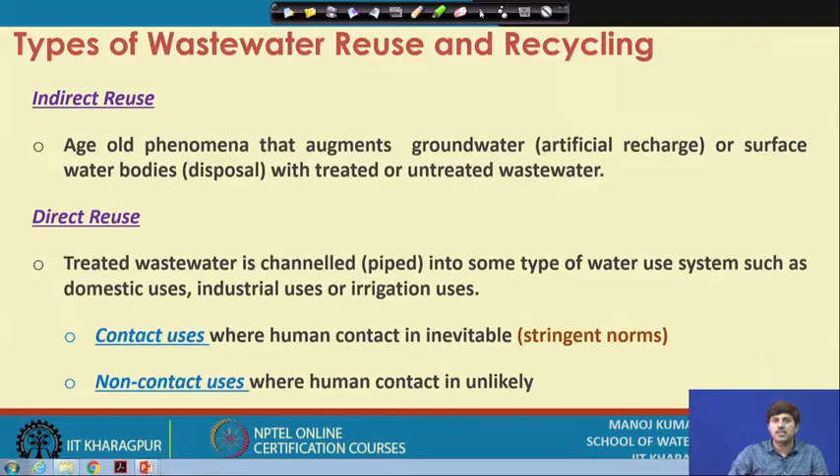What's more important and a newer phenomenon is direct reuse, because indirect reuse has a lot of complexity involved - like pollution of resources, stress on resources, as we discussed in the previous class. All those factors come in this indirect reuse or recycling aspect.

So what's better is direct reuse. Under direct reuse, the treated water is channeled or piped into some type of water use system, which could be domestic use, industrial use or agricultural uses, and these uses can again be subclassified in terms of contact uses and non-contact uses.

Contact uses are the ones where human contact is inevitable. So if there is likelihood of human contact with that water which has been reclaimed from wastewater, the norms of reuse or recycling are more stringent - we have to treat that water to a higher degree in order to protect human health.

Which is one of the most prime objectives of civil society, civilized systems. We are more bothered about human health, and there would be risk if the reused or recycled water is undergoing some sort of contact uses. So that is why the norms are more stringent for these.

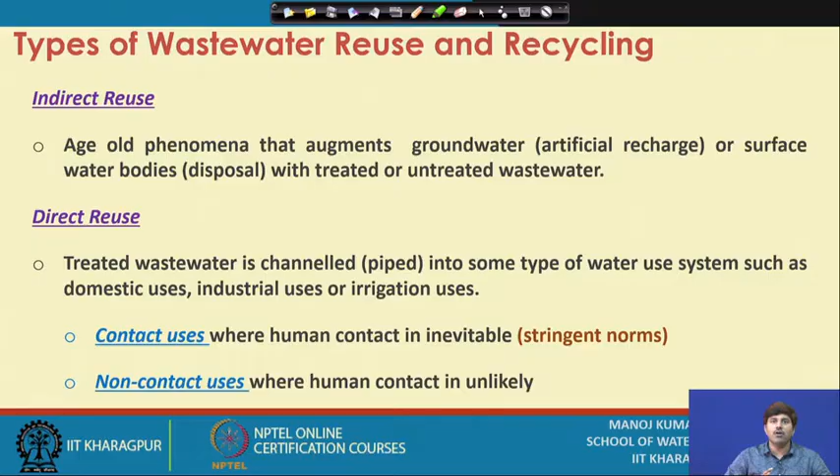So then we see what to recycle. When we say wastewater recycling, we go back to our basic discussions from the beginning of this course, that wastewater are of different natures, different characteristics, and we can subclassify or compartmentalize this wastewater - there is a greywater component of the wastewater.

So we can make or come up with a strategy for recycling just greywater. There could be a discussion where we see that greywater recycling is more preferred or favored as opposed to sewage recycling or the whole of wastewater recycling.

So greywater, as we discussed earlier, is the water which comes from household uses apart from the toilet - water coming from washing clothes or washing machines, washing utensils, bathroom, water coming from shower. All those are sources of greywater, and we can have water coming from the kitchen. So those are sources of greywater, and we can adopt a suitable treatment strategy, whatever the strategy could be.

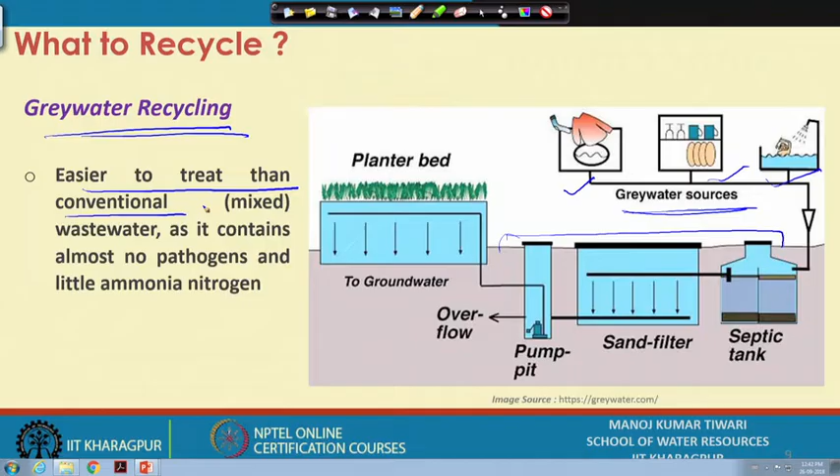Because it is easier to treat it than a conventional wastewater system or mixed wastewater system. The issue with the mixed wastewater system is that when toilet flush is also included, a lot of solid mass comes in, a lot of organic load comes in the form of fecal matter, and a lot of pathogens come in, which survive on that fecal matter. So that is why that portion is quite contaminated, and we do not include that.

If we do not include it with the other components of the wastewater coming from, say, the kitchen, bathroom, washrooms, those places, that means if we do not add this black water component along with the greywater component, the water we have will be much milder in terms of pollution. Okay. So, because it has milder pollution, it is easier to treat this greywater component.

We can treat it at lower cost. There is not that great a degree of pollution in this, only relatively much milder pollution. So that is how the treatment cost decreases, and the reuse applications could be more, as opposed to the water coming from the toilet.

Okay. So, since it contains almost no pathogens and very little ammonia, nitrogen, and very little organic loading, it is advisable, and people are giving more emphasis on the treatment and recycling of grey water as opposed to the entire sewerage or wastewater system, for that easy reason, particularly if it is to be done on a decentralized scale, let us say a household scale.

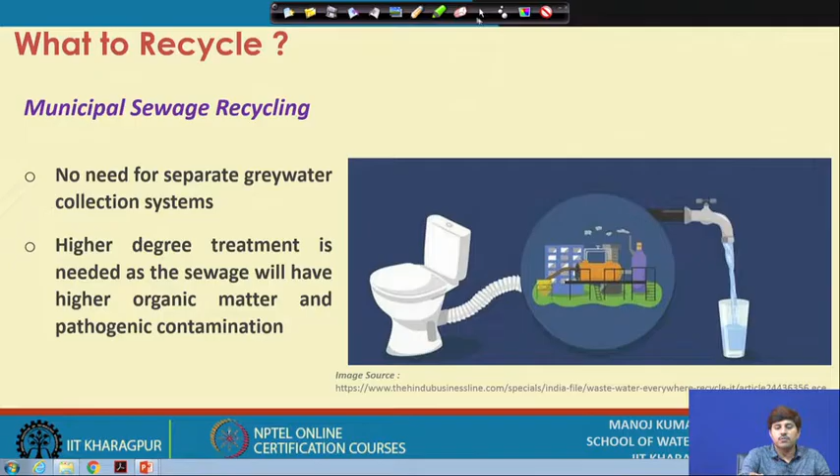Okay. So those are the advantages and disadvantages associated with whole sewage recycling. We will save some cost by not having separate collection systems and separate transportation if needed, but at the same time we will have to go for a higher degree of treatment as well. Okay.

Then there is industrial effluent, which can be recycled. Industrial effluent recycling is reusing treated wastewater, usually for industrial processes. Within industry it is far more preferred to use it for industrial processes, or for other processes at the plant site itself. Remember, in the last class we were discussing the concept of zero liquid discharge.

Industrial effluent recycling is more associated with the zero liquid discharge concept, where we can reuse or recycle the whole of the waste generated, either for some industrial process within the industry or for other applications like gardening, flowering, and cleaning, washing, all those purposes within the industry. So not letting any effluent come outside the boundary or periphery of the industry.

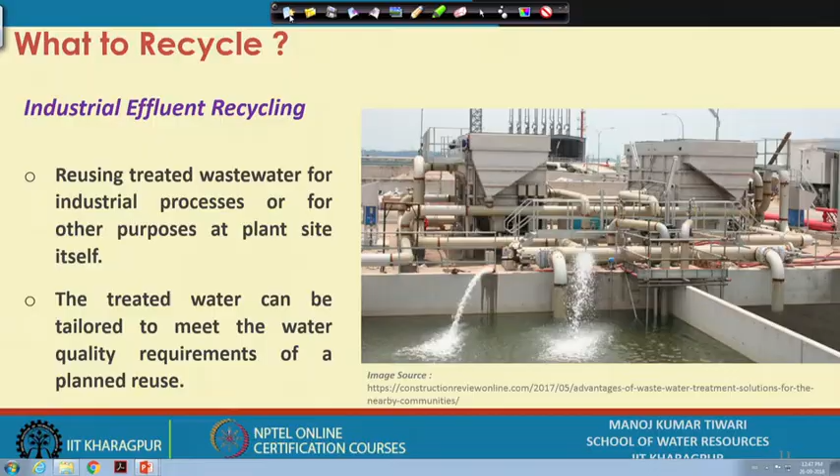So, this treated water can be tailored to meet the water quality requirements for planned reuse, and this planned reuse, as we said, could be anything: it could be industrial processes or other aspects taking place within the industry. Okay. So, that is one component.

Then there is stormwater or rainwater uses. Okay. So, we can go for stormwater or rainwater uses. This is not exactly a kind of reuse, because when we collect stormwater or rainwater, that is not used water, that comes naturally to us, but if we do not use it, it is considered as a component of wastewater, or it has to be treated as wastewater.

So, stormwater is collected through stormwater drains or channels; many times, if we have a combined sewerage system, it is mixed with the wastewater and then treated together. So, that becomes quite a challenging task because of the large volume and because of the milder pollution due to the dilution with the stormwater.

But eventually, the stormwater can also be considered as a resource, and using this stormwater can essentially be considered as wastewater reuse, because anyway it is being disposed of as a form of waste. So, if we are able to use that, we can say that we are using a component which is considered as a waste, right. So, stormwater harvesting systems are to be installed to collect stormwater or rainwater and recycle it, usually for irrigation and other purposes.

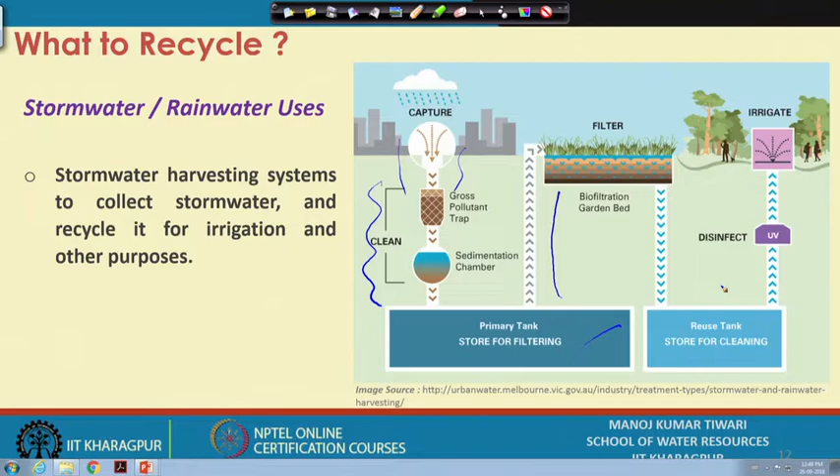Okay. So, we can capture the stormwater coming in, pass it through mild treatment systems, then store it in a tank, and from there onwards we can use it for the purpose. Okay. So, that is how the stormwater or rainwater reuse concept can also be utilized.

So, these are the different sectors for reuse. Okay. As we discussed, we can reuse or recycle these different components. We can reuse greywater, whole of the wastewater, industrial water, and stormwater that is being collected. Okay. Agricultural runoff can also be recycled, but since it comes at various different places, the collection is quite tricky and quite difficult.

So far we discussed the different components or types of wastewater which we can think about reusing. Now, if we see the opportunities where we can reuse, reuse can be in two forms. One is reuse without treatment, and the other one is when we go for certain treatment for reusing the wastewater. Reuse without treatment, since we are not providing any treatment, is obviously going to be a cost effective system.

Okay. The cost of these systems is going to be low, and this reuse without treatment can usually be for two types of application. One is again quite an age-old philosophy, which is small scale agricultural application. Now, I am sure most of us have at some point of time spent some time in the villages or have visited the villages.

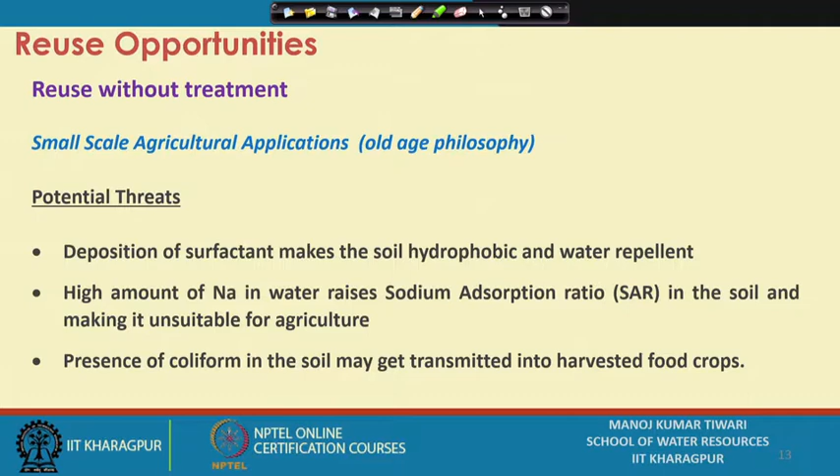If there is high sodium in the water, that can raise the sodium adsorption ratio of the soil, making it unsuitable for agricultural purposes. And if there are coliforms present in this kind of water, they may get transmitted to the harvested crop system as well. From water they can get transmitted to soil, from soil to the crop, and if we consume those crops, there may be certain health problems associated with that.

The other option of using wastewater without treatment is a relatively much newer philosophy, which is for domestic application, using it for toilet flush. People think particularly of grey water, because the toilet flush water may not be used again for toilet flush. But in a few apartments, a separate grey water collection system has been installed, and the grey water is channelized to toilet flushes without any treatment.

So, the grey water, or part of the wastewater, can be used for the toilet flush system, which is a new philosophy that was not in practice earlier. So, we can use it only for non-contact applications. There are certain potential threats associated with this as well.

The threats are that there could be a possibility of clogging in the pipes due to the deposition of suspended solids. The water which you are collecting may have certain suspended solids, and if you allow that to go to the toilet flush, there might be some settlement, some sedimentation, and if there is a lot of deposition, your pipe systems or drainage systems can actually get choked because of these suspended particles.

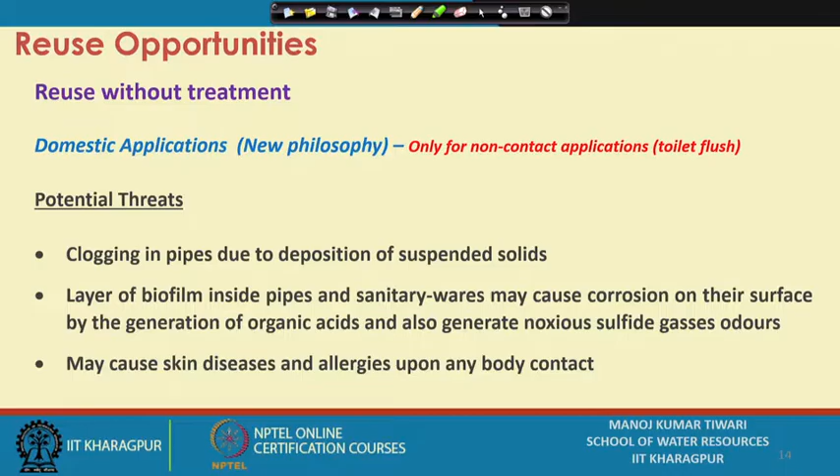So those are the reuse opportunities without treatment. There are major reuse opportunities with treatment. When we say reuse and recycling of wastewater, one inherent component is that we reuse it with treatment. With treatment, reuse options include the irrigation sector, so landscape, agriculture and aquaculture; non-contact domestic application, contact domestic application, and industrial application.

If we are able to purify that water, since the wastewater has been converted to pure water through proper treatment technologies, then depending on the degree of treatment we provide, we can select the specific reuse option. If we can treat it to the purest level, it can conceptually be used even for drinking. Because if you have removed all the contaminants, processed it fully and put it through an RO system which ensures removal of all contaminants, why can this water not be used for drinking? Keeping aside the social obligations.

So if you keep aside the social obligations, when you reclaim the pure water from a wastewater, why you cannot use that water for whatsoever purpose? And there have been cases, like in Singapore, where the NEWater system actually treats the sewage to the level of an RO system, and then the reclaimed water is augmented, basically mixed with the domestic water supplies, and people are using it. So absolutely there is no problem, there is no health concern, there is no risk.

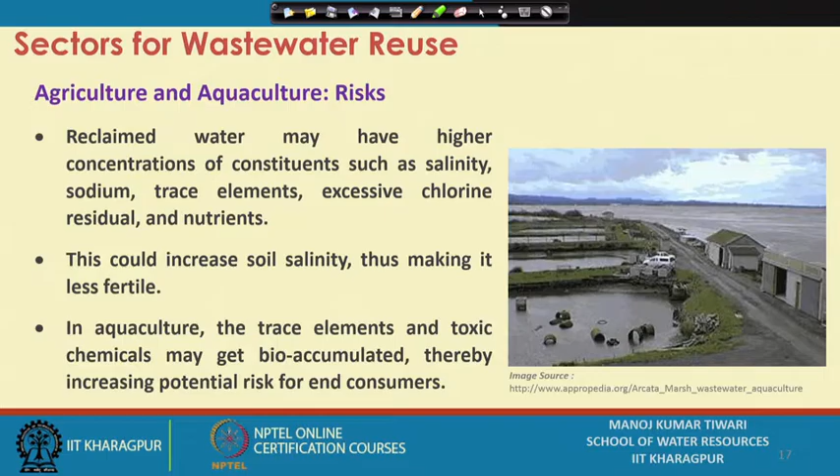So, what are the various risks involved in the agriculture and aquaculture reuse of wastewater? The reclaimed water may have higher concentrations of various constituents such as salinity, sodium, trace elements, and there might be chlorine residual, because we chlorinate, we disinfect the water before supplying it to the households. So there might be residual chlorine, there might be a higher degree of nutrients. Nutrients are not that much of a problem for agricultural systems, but if they are excessive, again that is not desirable.

But if these kinds of contaminants come into the soil system through irrigation, they can increase the soil salinity, thus making the soil less fertile. In aquaculture also, trace elements and toxic chemicals which are there may bioaccumulate, thereby increasing the potential risk to the end consumers of these aquaculture products.

So, if you are going for, say, fish farming in contaminated water, what will happen is that if there are some toxicants present, they may be consumed by the fishes, they may be retained in the body of the fishes, or they can get absorbed on the body. So when that fish is consumed by someone, those toxicants can get transferred to the person consuming it. So the end consumers may get affected by these contaminants. That is the major risk associated with this.

Then there is the municipal sector, so we can reuse it at the household level for toilet flushing, or we can reuse it only for non-contact uses like air conditioning, irrigating lawns, gardening, etc.

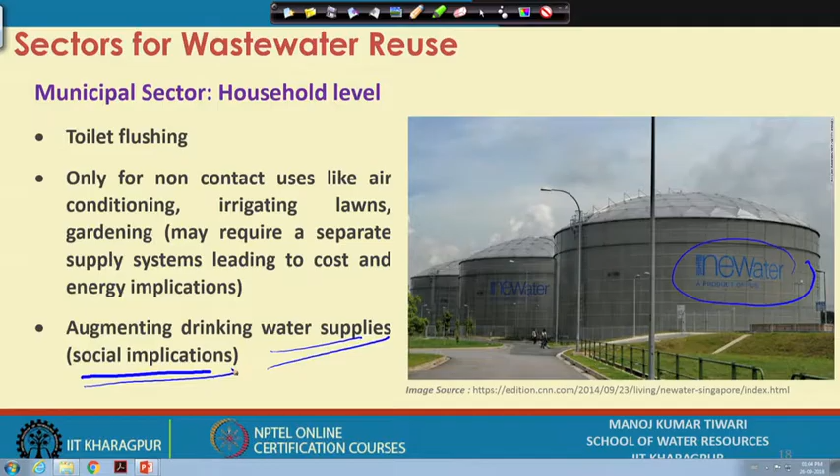But this may have certain social implications, which we will discuss in later classes, that people may not be readily able to accept recycled wastewater coming into their drinking water or kitchen. If you know that the water you are flushing from your toilet is going to come back again to your kitchen and you are likely to cook food in it or drink it, there might be certain social reservations. These reservations have been seen in many parts of the world, not only in developing countries or India, but in many developed nations also. So public acceptance of reusing water for drinking purposes is one of the major challenges today when we think about reusing the entire sewage or wastewater for domestic supplies.

Then there are various other urban uses in the municipal sector, which could include irrigation of public parks and recreational centers, landscaping areas surrounding public buildings and facilities, and irrigating golf courses. There are various commercial uses like vehicle washing facilities, laundry facilities, window washing, dust control, watering streets, and mixing water for pesticides, herbicides and liquid fertilizer. There are ornamental, landscape or decorative water uses like fountains, water parks and pools. There is fire protection through fire hydrants, which needs quite some water, and reclaimed water can be used for that purpose. Toilet and urinal flushing in commercial and industrial buildings is another sector where this water can be reused. So there is a lot of potential for using water in the municipal sector apart from domestic supplies.

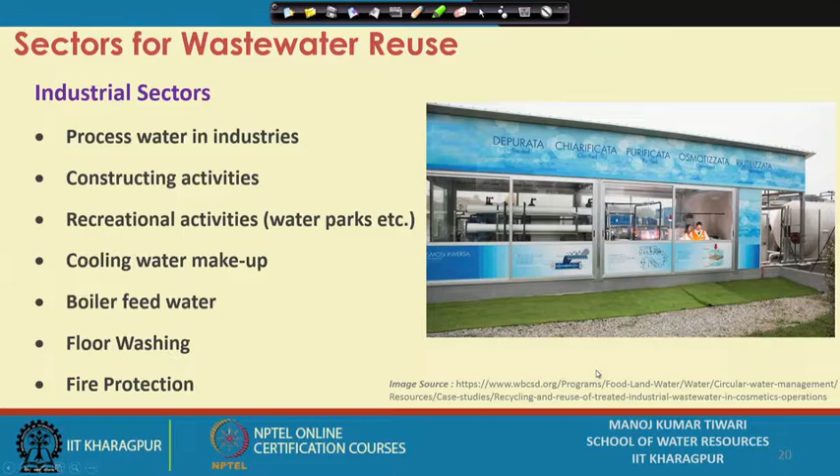So there are variety of reuse possibilities with the industrial effluent as well. Then there is the environmental sector where this reclaimed water or treated wastewater can be reused. So one of the major reuse potentials in the environmental sector is artificial groundwater recharge.

Artificial groundwater recharge is where water is used for recharging the groundwater. Where there is a great degree of groundwater depletion, where your water table is getting lowered and your aquifer is not having enough water, these kind of systems are adopted in order to maintain the aquifer levels and groundwater tables. So we can make artificial recharge basins or artificial recharge galleries through which the water percolates through a filter bed and eventually reaches the subsurface level.

So here again the filter bed being used has a responsibility to treat that water, to purify it before it gets mixed with the groundwater. So that again must be ensured, that the water is not eventually polluting the aquifer water, which is a big issue.

Because you are putting water inside the groundwater systems, if you end up polluting your groundwater... if this water is getting filtered properly, by the time it reaches the subsurface it is fine, but if that is not happening, your groundwater may get certain pollutants which are there in the wastewater, and then once you pump that groundwater elsewhere for use, you get exposed to those pollutants as well.

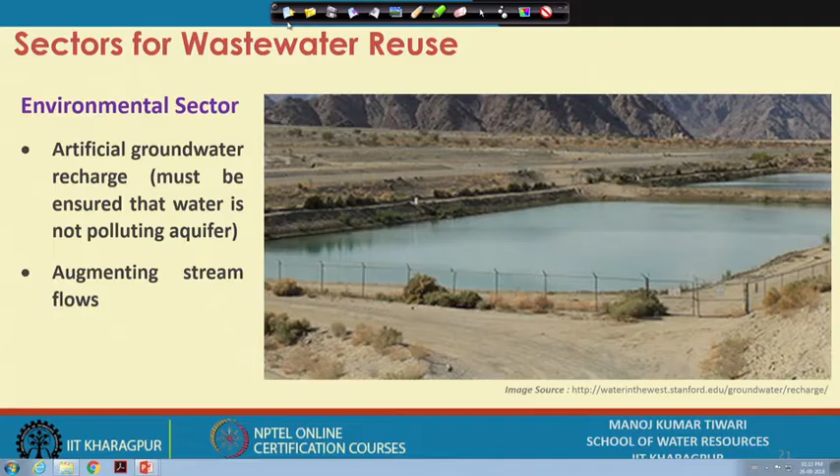So there are a lot of artificial groundwater recharge projects being taken up across the world, but there has to be proper assurance of the quality of water reaching the aquifer level. That is one of the important factors which must be seen. It can also be used for augmenting stream flow - if properly treated, we can put it to a surface stream, which can be used for recreational or other purposes. So these are the kind of reuse in the environmental sectors.

So to quickly summarize what we discussed in this class: there is wastewater generation at different levels which could be recycled - greywater, total sewage water, industrial effluent, or stormwater. This recycled water could be used for different applications from different sectors: agricultural sector applications in the form of irrigating food or non-food crops, municipal sector applications, urban sector applications, industrial sector applications, and environmental sector applications.

Each have their own pros and cons. There are risks associated with each of the reuse options. So one must evaluate these options properly before decision making - that is, deciding to reuse this component or this part or this much volume of wastewater, purify it following certain methods, and then reuse it for certain applications or purposes. So there has to be decision making involved, based on sound knowledge of the risks and implications, particularly health and environmental risks, of the various reuse options that reclaimed water can be applied at.